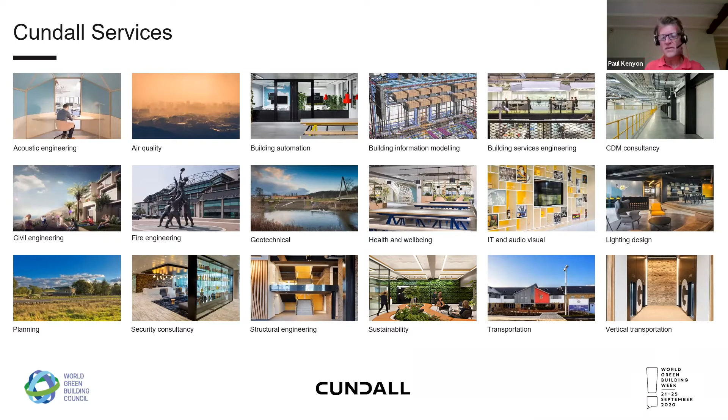The climate emergency requires action across all sectors. No sector is exempt from having to address their environmental footprint, and we're increasingly finding opportunities to do this in all of our sectors. Lots of clients are pushing for net zero carbon now.

So just a reminder, what is the climate emergency? I don't know if you saw the BBC documentary last week on extinction, but David Attenborough said that while habitat reduction is the most urgent issue to address, most scientists agree that climate change is the greater long-term challenge. We're currently on a trajectory for at least a 3-degree global temperature rise, well above the targets and aspirations of the Paris Agreement, which will have a profound impact on us all.

It's therefore vital that we act now and act fast, in the hope of alleviating the worst of the predicted outcomes. In order to achieve reduction on this scale, we need complete societal transformation to flatten the emission curves and allow our ecosystem to cope. So achieving net zero carbon must be at the heart of our industry's response to the crisis.

Over the past couple of years, we've seen the impact of climate change for ourselves as the weather becomes more severe and widespread, from the recent forest fires and bushfires in America, Southern Europe and Australia, to the flooding that we saw in the UK back in February. The evidence is here for us all to see.

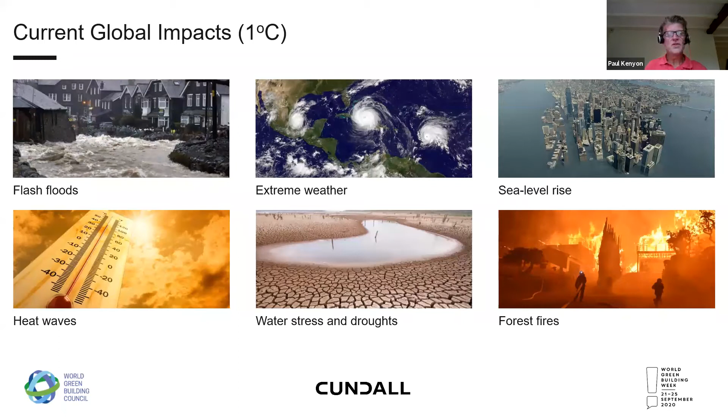So what are the drivers for change? What will make us change? At the most basic level, government regulation will drive us to improve our game. The UK Parliament, having declared a climate emergency and amended the Climate Change Act, committed the UK in June 2019 to reaching net zero carbon by 2050.

Previously, we only had to achieve 80% of this. But unfortunately, only a month later, in July 2019, the Committee on Climate Change reported that we were already falling short of the 80% target, implying that it'll be very, very difficult to achieve net zero by 2050.

The second driver for change is through local authorities. Most major UK cities have now declared that they'll be carbon neutral well in advance of the 2050 target. Part of the attraction is that bold climate action can deliver many benefits, such as better health and well-being, improved air quality, economic savings for individuals and businesses, new jobs, less congestion on roads, and cleaner and greener places.

Interestingly, the councils that have spent the most time researching the extent of the challenge ahead have set less ambitious targets, with Manchester set to become net zero carbon by 2038, whilst others believe it will be possible in the next 5 years - rather unrealistic, probably.

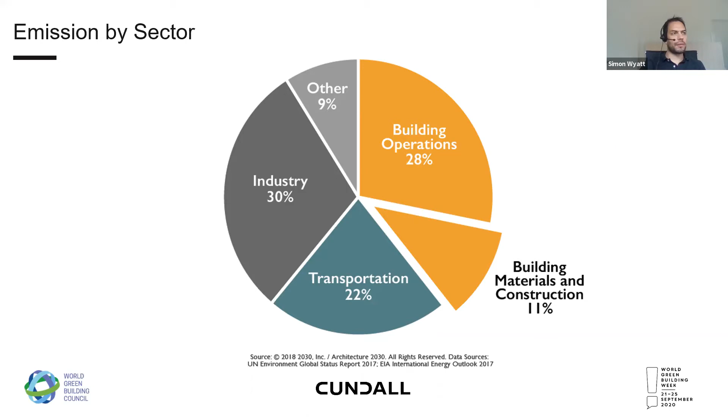Thanks, Paul, and good morning, everyone. So why is this important to the built environment? Well, the built environment is generally considered to be responsible for up to 40% of CO2 emissions in Europe, 11% of which are from the actual construction of the building and almost 30% from its day-to-day operation over the life of the building. So over the last couple of years, there's been a real push from the World Green Building Council on their programme Advancing Net Zero Carbon, where they've set a roadmap towards net zero carbon buildings, with new buildings becoming net zero carbon by 2030 and existing buildings becoming net zero carbon in operation by 2050. And then by 2050, all new buildings are also considering whole life carbon, which includes embodied carbon.

To aid this process, they've released a number of documents explaining their approach to net zero carbon and how to do carbon assessments, including embodied carbon reviews, which we've helped them produce. This is a really good starting point, and it's now being taken on by the local green building councils, including the UKGBC, who have put together a really comprehensive framework for the UK on how we actually deliver net zero carbon buildings.

So the framework which the UKGBC have come up with is as shown on the screen: reduce construction impacts, reduce operational energy use, use renewables on site where possible, and if not, via purchase agreements. Then only once you've reduced the energy as much as possible on site can you use offsets to remove any residual carbon emissions. What's really important with this is public disclosure and transparency. We need to make sure we can hold people to account on their claims, so all data must be published on an annual basis so that it can be reviewed.

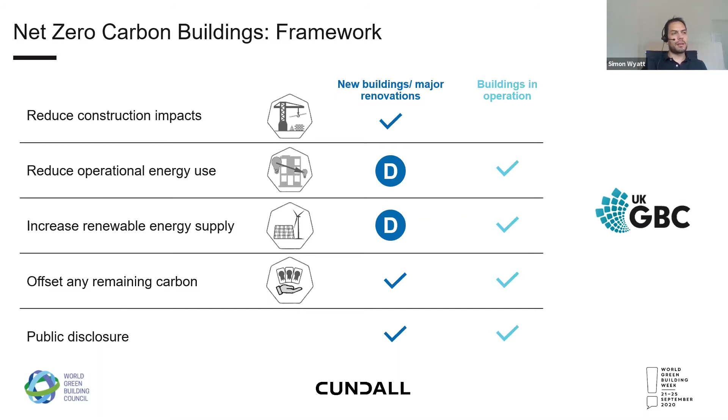But the question is, how do you set an energy intensity target for net zero carbon? Well, the way that the UKGBC and LETI have done this is to go through and look at the UK and say, what is a net zero carbon economy? And a net zero carbon economy is one where our energy demands are met 100% from renewable sources.

At the moment, we consume considerably more electricity than we're able to produce from renewables. In order to move towards or transition to a net zero carbon economy, we must reduce our demand at the same time as increasing our capacity for renewables. Only when the two meet can we claim to be a net zero carbon economy.

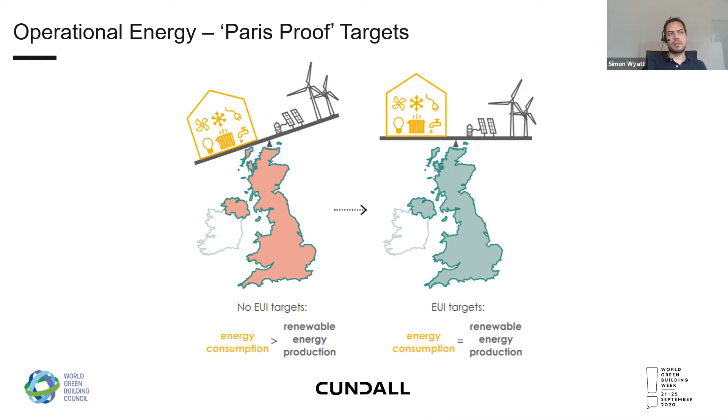That generally indicates that we need to reduce our demand on electricity by about 50 to 60%. This is going to be challenging as we move to electrify vehicles and buildings, and aviation and other sectors are going to be more difficult to decarbonise.

So the built environment, if we want to set a net zero carbon operational target from a top-down approach using Paris-proof methodology, then we kind of look towards this kind of 60 to 70% reduction in operational energy.

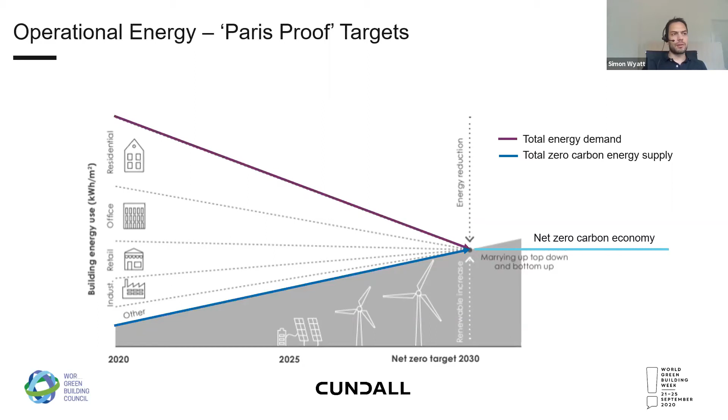At the same time as looking at this from a top-down approach, we can also look at it from a bottom-up approach. This is what the London Energy Transformation Initiative did, which was a group of volunteers who've been looking at net zero carbon across the industry. They modelled a good practice building, which achieved an energy intensity of around about 160 kilowatt hours per metre squared, which is fairly good in today's market.

Most buildings are up over 200. And then they applied even more stringent design criteria and measures. They worked out that if they applied pretty much everything they could think of, they could get energy consumption down to around about 55 kilowatt hours per metre squared.

And that's a number you'll hear quite a lot when you're talking about net zero carbon. It's listed in the UKGBC, the LETI, the RIBA challenge guidance as the target for commercial developments. There are also targets for schools and residential, and more targets are being developed at the moment. This is being done across the world by all the green building councils, so there's cross-reference to see how other sectors and other areas are moving towards net zero carbon.

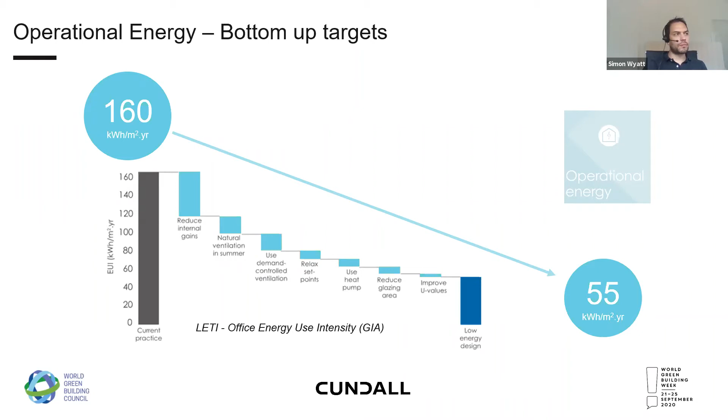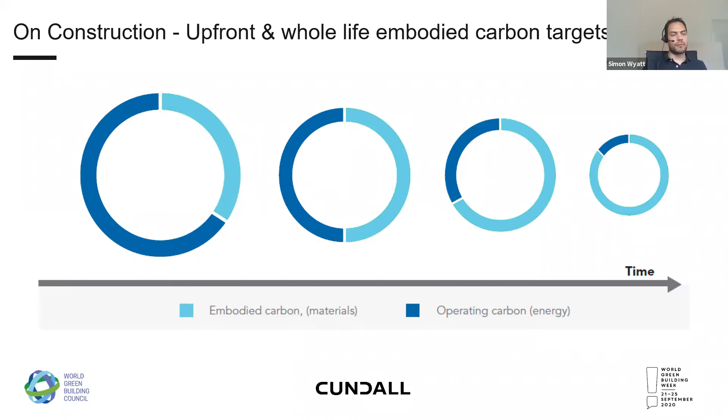As we decarbonise operational energy, it means that the importance of embodied carbon will increase over time. All emissions will fall over time, but the proportion of a building's carbon footprint will obviously move more towards the upfront embodied carbon associated with its construction.

When we talk about embodied carbon, what we mean is all of the carbon that's associated with the construction, operation and deconstruction of a building. We use the term upfront embodied carbon to cover the process, extraction, materials, transportation to site, and the site activities up to practical completion.

That is the upfront embodied carbon, and that can be reported for any building on completion. Then the in-use embodied carbon is for things like maintenance, refurbishment, repair, which should be reported on an annual basis along with the operational energy. And then at the end of the life, when a building's deconstructed, we need to consider the carbon emissions associated with the material disposal and hopefully reuse as we move towards a more circular economy.

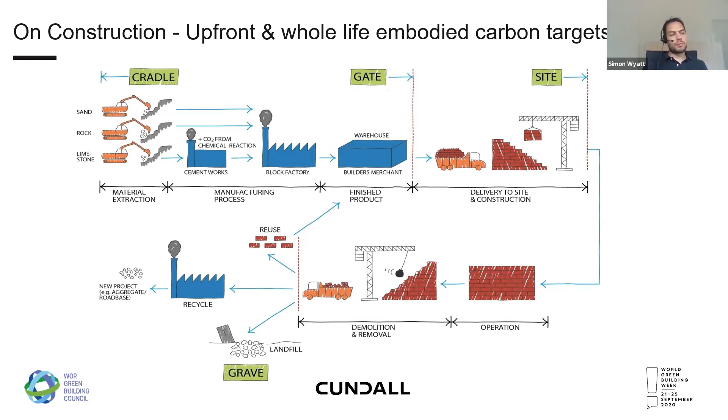As well as operational energy intensity targets, the industry is looking to set carbon intensity for upfront embodied carbon and whole life carbon. Cundall worked with the GLA recently to help set their methodology for doing embodied carbon and whole life carbon assessments, and we're speaking to Manchester Council at the moment to do something similar.

When we reviewed over 40 buildings which had recently been built in London, which had done whole life carbon assessments, the average upfront embodied carbon intensity was over 1,000 kilograms of CO2 per metre squared.

The GLA aren't setting targets, and nor Manchester for this yet. They're just having a requirement for doing an assessment, but they are giving benchmarks, and the GLA benchmark at the moment is 900, which is a small reduction.

But LETI and other institutes are going much harder, and they're pushing for targets of 600 and then eventually down to 350, which is kind of a 60 to 70% reduction in embodied carbon, which is in line with the World GBC recommendations and report.

This is extremely challenging. As you can see from these examples here, there's almost no buildings achieving that kind of level, and the two that are on the left-hand side, which are achieving the LETI 2030 target, are heavy refurbishment projects, not new build.

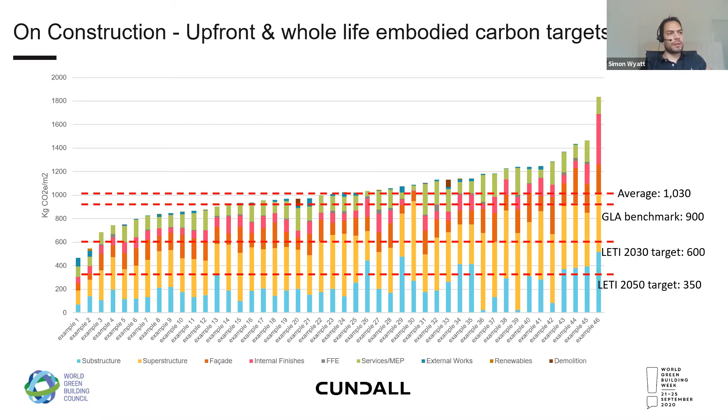Over the last 6 months, we've seen a whole raft of intensity targets come out for operational energy, embodied carbon, and whole life carbon. What's good is they are aligning as more and more data becomes available. A lot of design teams are challenging them at the moment and seeing how they can work towards them, and the feedback is being used to revise these targets. But they are challenging, and that's the idea of them, to challenge the industry to work as hard as possible.

With all the frameworks that we've seen released over the last year, Cundall have pulled together the best of what we've seen into what we call our steps to net zero carbon, which we apply to both new buildings and existing buildings. Starting with passive design optimization, removing fossil fuels, using renewables, considering upfront and whole life carbon, and then really focusing on that public disclosure and reporting piece so that we have that transparency, so we can see what's going on in the market going forward.

What's been interesting is, as Paul alluded to, we are in a climate emergency. And when healthcare professionals and disaster relief professionals turn up to an emergency, what they use is a triage methodology to assess where to focus their activity. So when they turn up to an accident, they basically try to prioritize who to treat. Generally, the easiest people to treat and the ones that demand the most attention are normally the walking wounded, the ones running around screaming or making the most noise, whereas we should be concentrating on the people who aren't making noise or are looking in trouble.

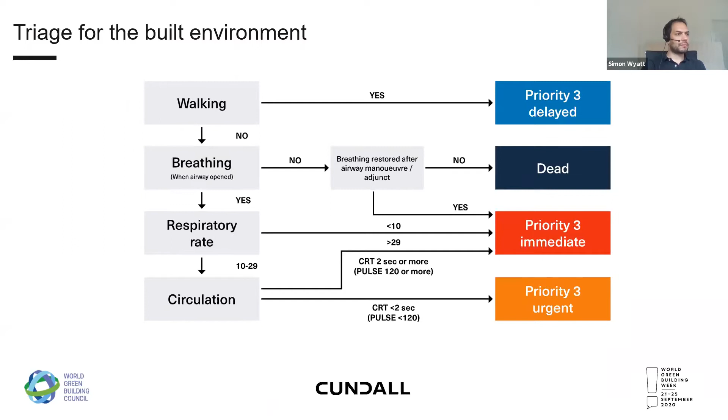So where to start? Well, over the last 6 months, Cundall have been working with a number of clients to look at their carbon footprint and portfolios. What we've realized is that we need to look at it at 3 levels, which is obviously the building and asset level, which is easy enough to do — we have the standards for that.

But again, in order to prioritize, we don't want to look at just the individual assets. We want to look at a portfolio and estate of properties and work out where the resources should be spent, where the time, effort and money should be going. But to do that, first and foremost, we must look at a corporation in its entirety to really understand its carbon footprint. We're working with a number of organisations to do carbon footprinting, setting science-based targets to align with the Paris agreement, and then driving that through their real estate and into their portfolios. So it's really a top-down approach, from understanding your footprint to taking action.

And as part of this process, we can actually look to certification, so you can make anything carbon neutral certified. As Paul mentioned earlier, we're just finalising our carbon certification for Cundall across all 3 scopes, and we should hopefully be a net zero carbon business by the end of the month.

You can have a net zero carbon certified building. You can have events - we've recently certified a TEDx event. Products, organizations is the main one that's certified. And you can also do districts, cities - the C40 program is looking to decarbonize cities. So we can look to certify against any of these things if required.

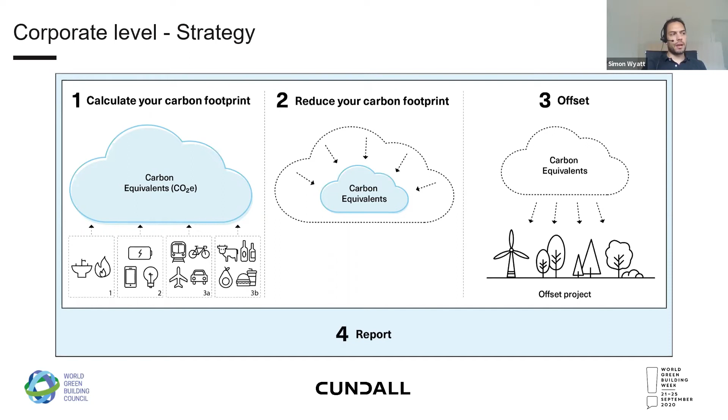And then the final process is that annual reporting and transparency piece. You often hear when we talk about carbon about scope 1, 2, 3, and it's generally quite confusing and not everyone kind of understands it. So we'll just give a quick recap of what we actually mean by different scopes and how they apply in the built environment. So scope 1 is fairly easy to understand.

Those are basically your direct burn of fossil fuels. So if you have a building and you have gas boilers or diesel generators, those are scope 1 emissions. If you have fleets of vehicles which use diesel or petrol, then they're scope 1 emissions.

Scope 2 emissions are associated with your indirect use of energy within buildings. So that is electricity. If you're connected to district heating or cooling systems, they're included in your scope 2, but 99% of the time it's just your electricity that you buy.

And then scope 3 is the complicated area. A lot of people, when they talk about being carbon neutral or looking at their carbon footprint, generally only consider scope 1 and 2. Scope 3 is much more complicated because it's the indirect supply chain impacts, and they're both upstream, so when you procure and build things, and downstream when you sell and use things.

What we do with quite a lot of our clients is when we're looking at corporate level, we cover all of scope 3, which includes things like business travel and commuting. But when we're looking at a property portfolio, we start to remove things which aren't applicable to the built environment - so things like the commuting, the sold goods, and the franchises.

There is a methodology in the industry which we help put together for the built environment, which is the RICS whole life carbon methodology, which covers about 90 to 95% of the things we've gone through. And it's a really good starting point for reviewing scope 3 emissions and whole life carbon in the built environment. Just be mindful it doesn't cover absolutely everything.

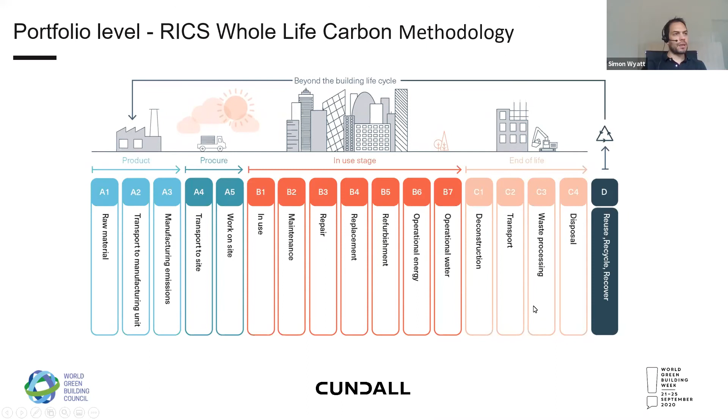What we look to do with quite a lot of our clients is set science-based targets for their entire operation, and that obviously will have to cover their real estate. So what absolute percentage reduction from the scope 1 and 2 emissions do we need to achieve from their building stock and their new buildings, and then translate that into intensity targets for the different building types using science-based targets as a driver, and then comparing those against things like the LETI, the UKGBC and the RIBA targets.

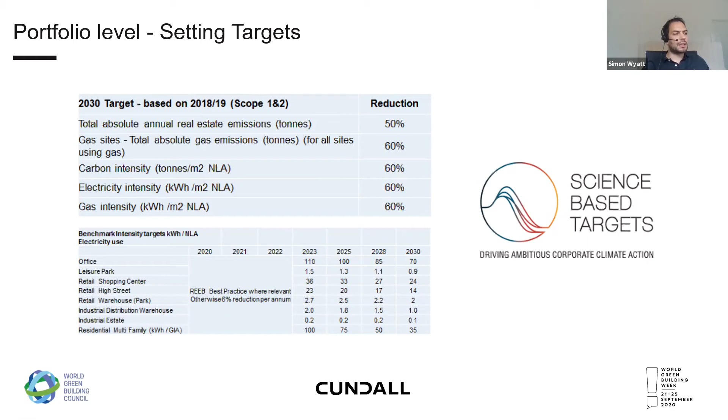Then it's fundamental to go into your actual buildings and start understanding what the actual energy consumption of those buildings is. So doing energy audits to get information on both landlord and tenant energy. If there is a split, if it's owner occupied, then just looking at the overall energy intensity.

A good way to do this is using the Australian NABERS scheme. This is being brought over to the UK by the Better Buildings Partnership as part of the Design for Performance, but at the moment it's very easy to just use the Australian scheme.

The Australian scheme was introduced over a decade ago and has reduced energy consumption in buildings by about 70% in Australia, which is really impressive. They have a 6-star system, where 6 stars is basically equivalent to our net zero carbon targets.

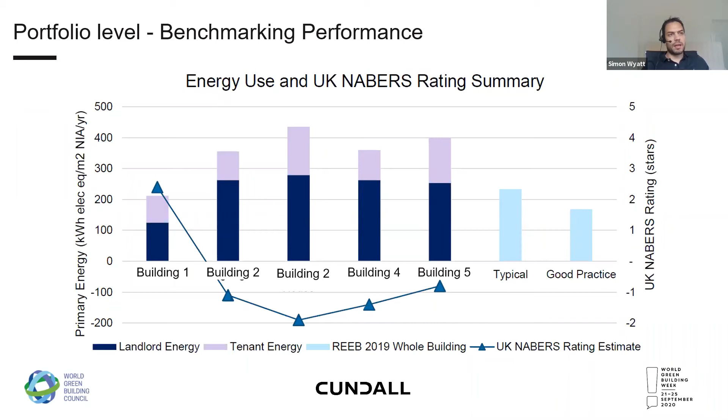We've been working with a few major portfolio owners to assess their buildings, and in the UK we're finding that the average stock isn't really achieving very highly on the NABERS scheme at the moment, as you would expect, because we haven't been designing to it. They're generally achieving less than 1 star on most instances.

When we start to collate all this data and carbon data, you can quickly use algorithms and machine learning to highlight quick wins and easy wins. This was a project we did with Newcastle Council to look at all their buildings. We just used fairly high level data, a lot around EPCs, but we're able to mine the data to see where there were quick wins.

For example, looking at the lighting efficiencies, we could quickly target the buildings which hadn't upgraded to LED and set an LED program in place. Also looking at things like air permeability, most of the buildings that the council owned hadn't had air pressure tests, so commissioning air pressure tests and doing remedial works was quite a quick and easy win for those types of buildings.

We also can use the data to prioritize actions and cluster actions together. So where we want to be converting to air source heat pumps and removing fossil fuels, we can target a number of buildings and try and procure work in a package. We're not just doing a one-off project which has a cost, we're looking to do 10 or 20 buildings as one commission, so it becomes considerably cheaper for the client to move forward on that arrangement.

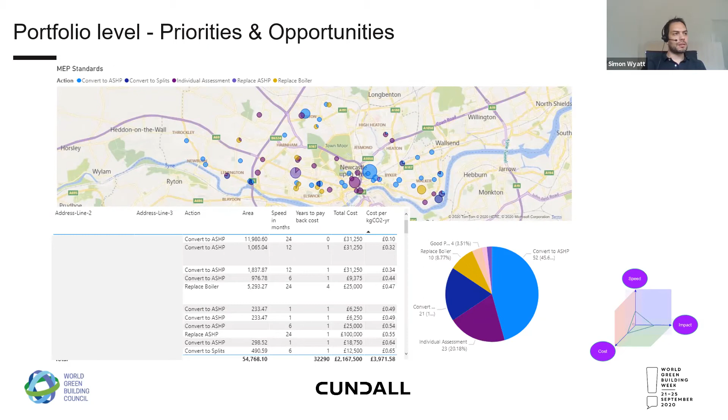What's also useful is looking for outliers. When we have a lot of data, building types will be clustered together, but you're always going to get buildings which don't perform as well or perform much better. Where we have buildings which perform much better, we can use the lessons learned to apply to the greater stock. And where we have poor performing buildings, we can either target that for quick wins, or realize that the building is probably a write-off and needs to be considered for redevelopment or redeployment somewhere else.

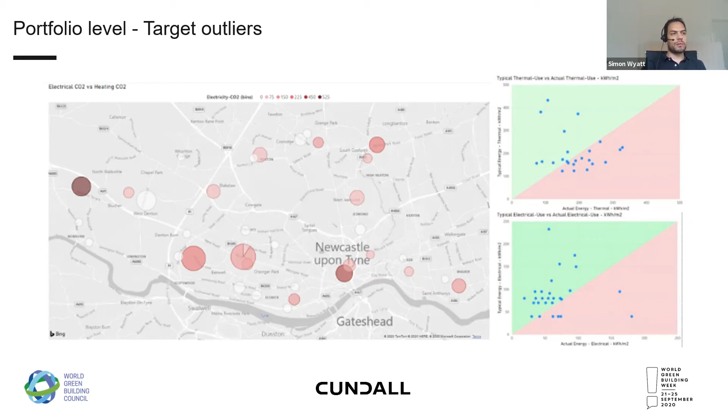Once we understand what's going on at portfolio and corporate level, then we can really start looking at individual buildings. So where you have a large portfolio, you might want to target 4 or 5 example buildings to use as prototypes to inform the decision making. If you've only got a few buildings, then you can just do analysis on those buildings themselves.

We offer at Cundall basically 2 levels of review. We do high-level asset reviews, which are roughly in line with ASHRAE level 2 energy audits. That is looking at the energy consumption of the building, comparing it to the benchmarks and LETI targets, and then using our 7 steps to do a review of what we consider to be net zero carbon.

For each of these 7 steps, we'll have 10 or 20 individual components. So for passive design, things like access to daylight, natural ventilation, insulation levels, air permeability, which will score against the net zero carbon criteria. Then we can give an overall score for that step and say how close it is to net zero carbon, and give recommendations how it can be moved closer towards the net zero carbon target.

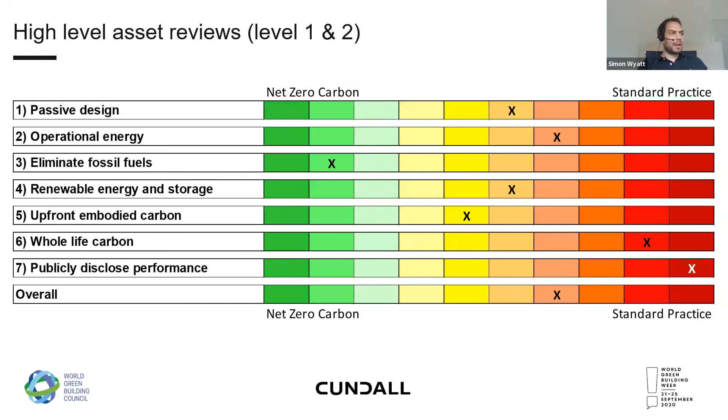So it's a very high level review. It can be done fairly quick and easy, but what it won't give you is a pathway down to the intensity targets we discussed earlier. And we can use that for any type of building.

We've been using it quite extensively recently with the Department for Education on schools and looking at their Gen Zero schools project, which we'll do separate seminars on later, looking at how we can get net zero schools, and that's really focusing on passive design and how we can reduce energy consumption.

Residential, especially high-rise residential, is a major challenge, looking at how we can re-insulate and reduce energy consumption. Whereas light industrial is an interesting one, because if we use our 7 steps, most of these buildings have brick walls and crinkly tin roofs, so they're poorly insulated, but there's no point investing in insulation in these buildings, because 80 to 90% of their load is process load.

So we really want to engage with the tenants and occupants to reduce their process load rather than spend resource and carbon insulating the buildings for little benefit.

Probably one of the biggest challenges is commercial buildings in city centres. In dense urban environments, you'll have a lot of buildings which are sealed, fully glazed, energy intensive, and in order to decarbonise them, there's going to be significant facade works required and potentially recladding associated with those works. Again, we can highlight all of this without doing any detailed analysis.

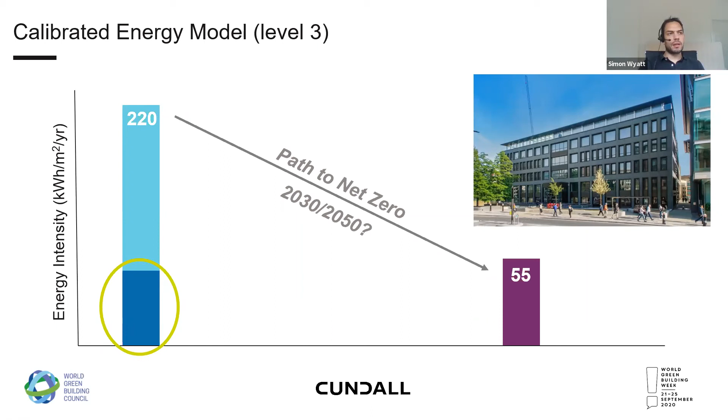We can just use the 7 steps as guidance for how we go about that. What we also have been doing for a number of clients is detailed level 3 energy audits to ASHRAE standards. This is where we go in, get a full energy audit using as much sub-metering as possible to understand the energy consumption of the building, and then build a fully calibrated digital twin of that building to get the same performance, and apply parametric modelling and run a number of optioneering activities to produce a pathway down to net zero carbon.

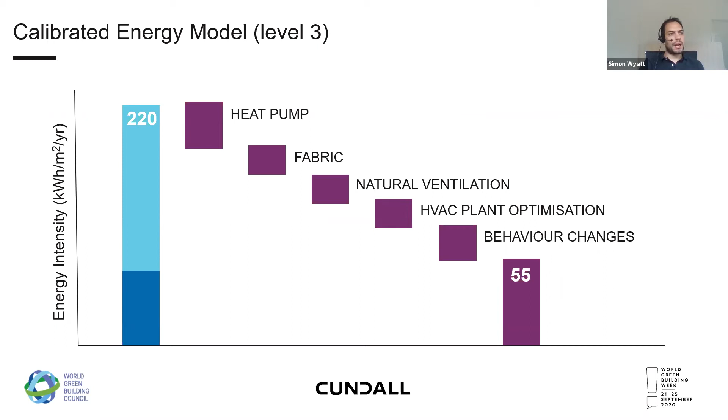So introducing things like heat pumps, improving the fabric, moving towards mixed mode ventilation using natural ventilation, and then looking at behaviour change. And then we can map that out on the design and show how we can move towards those intensity targets we were talking about earlier.

What's interesting with most existing buildings, especially commercial, is they have sitting tenants, they have existing plants, they've got facade replacement plans already in place. So it's how we factor our net zero carbon pathway into that. Most buildings, you can't just go in and take possession and do the works.

You need to wait till the leases run out and you can take possession of certain floors. So the work has to be phased over a period of time, and that will dictate when the building achieves net zero carbon. For the building I showed on the previous slide, their aim was by 2030, but they didn't have a major break in their lease clauses till 2034. So that was the earliest we believe we can get them to net zero carbon, because they need to do significant work on those floors.

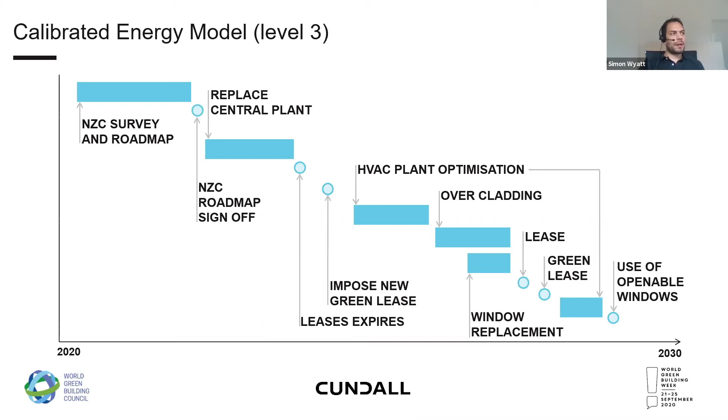So I'll just finish up with some quick wins and key considerations. The quick wins are things we can do to any building. You can just go in and make significant improvements in energy efficiency, probably 20–30% improvement. The key considerations are things which are going to take a lot more time and effort, but probably need to be considered for most buildings in order to get them down to the intensity targets.

For example, a fairly easy quick win is going in and replacing existing lighting with LED lighting. Sounds very simple, it is. Also controls with photocell and absence detection. Another major quick win we've seen is just changing set points and controls.

So a lot of buildings will heat and cool to 22 degrees, which means they'll be simultaneously heating and cooling in different zones. They'll have competing equipment trying to heat and cool at the same time, and they're generally wasting a lot of energy. Whereas if we move those heating and cooling set points apart, it means we get less hunting and the systems are able to operate much more efficiently.

So heating to 20 degrees, cooling to 24 degrees, or even up to 26 degrees. Turning off plant out of hours. One of the things we're looking at with lots of net zero carbon buildings at the moment is having openable windows. You might not use them during operation, but most buildings use a lot of energy for out of hours usage when you've got 2 or 3 people in the building, but they're still using the cooling plant and mechanical ventilation because the windows are non-openable. So just installing openable windows will enable you to not have to run the plant out of hours.

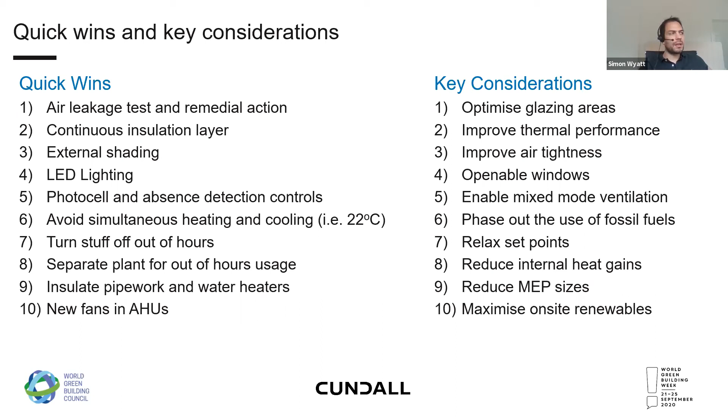In order to support all of these things, we've put together a range of services which our clients have been asking for. These cover everything from the building level—whole life carbon and operational energy—to portfolio strategies and roadmaps, and at corporate level, supply chain charters, carbon neutral certification and footprinting.

I'll finish with this call to action: we've seen the effects of climate change, and we're starting to see how they're impacting the built environment with extreme temperatures and flash flooding. The costs of insurance and remedial works is rising and will only get greater over time. So the cost of inaction is now greater than the cost of action. We really need to take action in the next decade and move towards net zero carbon.